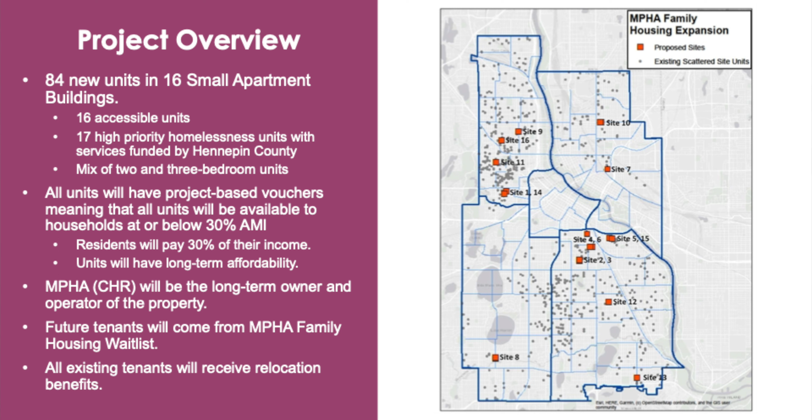The future tenants will all be people from the MPHA family housing waiting list. For those of you who know public housing, that means a lot of people, because the typical wait time is something like 6 to 7 years.

What brought them there was developing a strategic vision, and the fact that the city already owned a fair number of scattered site properties that could not be redeveloped for a number of reasons, as they just weren't financially feasible to rehabilitate. So they had a number of sites they could use for a scattered site project.

They currently manage 540 units. And importantly, the last 3 bullets on this slide, they felt really strongly that scattered site was the way to go because of their residents.

Historically, they have seen increased employment rates, increased incomes, and many families have gone on to homeownership if they had the opportunity to live in a scattered site.

So what we went from is 16 sites to 84 families that could live in scattered sites, because they were living in 4-plexes and 6-plexes instead of single-family homes. It's a huge multiplier effect for a program that's been so successful for families.

One of the things that struck me listening this morning is that innovation, wherever it happens, has to happen within the local context. I even talked about the fact that there's a lot of excitement in Sweden and in the European Union, because they now may have a platform that will allow for more innovation. The thought of having something like that in the US is really pretty exciting.

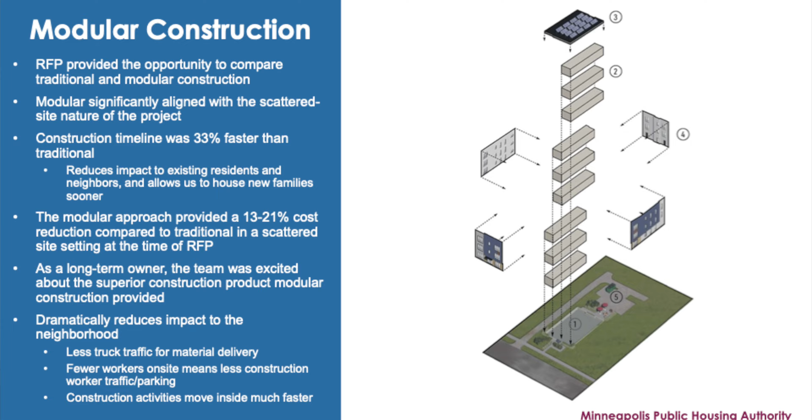It was really a factor because they were looking to get families into housing quickly, and the construction timeframe for this complicated scattered site project was 33% faster than the stick-built process. There was also less truck traffic since you're going into 11 different neighborhoods with these 16 sites, fewer workers on site, and construction activities move inside much faster.

Literally, on day one you're setting 6 modules, which they did on the fourplexes, so you have the ability to keep the site very quiet and friendly in a single-family neighborhood.

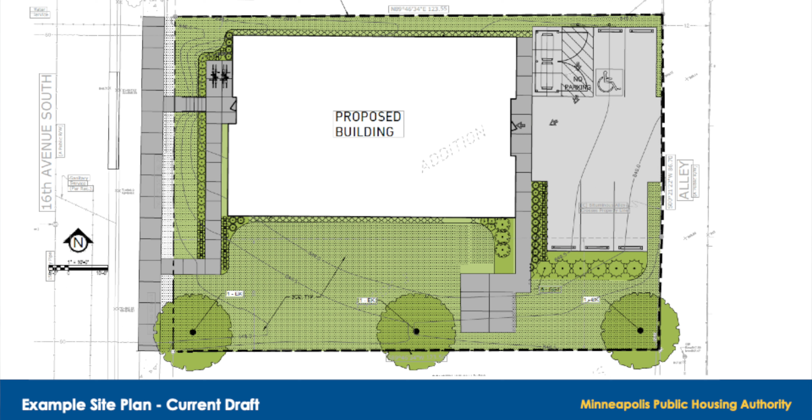One other factor I want to talk about, since scattered site gets talked about a lot as a desirable thing: one of the benefits of modular was that we had essentially one design, which I'll show you in a minute, and it had to fit on a number of different sites with different challenges, including mature trees, since this is in the middle of the city.

Before they even bid, the team that ended up winning went to multiple sites to ask, are there 16 sites among the ones the city made available where this building footprint will fit? If you look at these 6 sites, you'll see the building footprint is exactly the same, regardless of whether it's a 4-plex or a 6-plex.

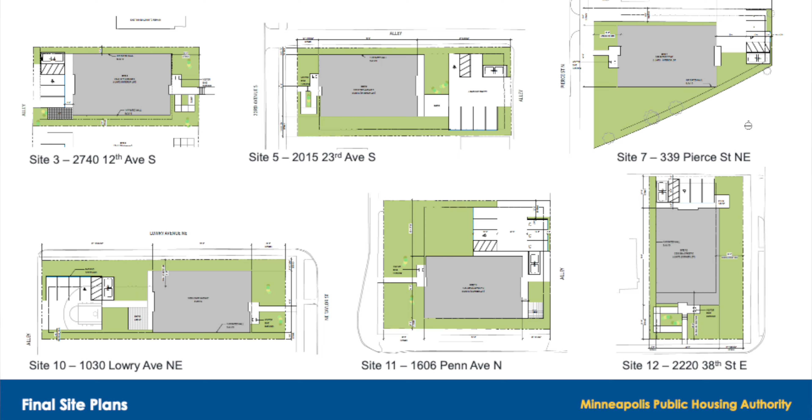The decision about which type of property, 4-plex or 6-plex, depended a lot on the size of the structure and, frankly, whether you could get the required parking on the site.

The design that was selected, and on the last page of this presentation you have the contact information for the architect who designed this project, was a single building type with a 4-unit and a 6-unit variant. The 4-unit is 2 stories: 1 two-bedroom and 3 three-bedrooms.

The 6-unit is 3 stories with 2 two-bedrooms and 4 three-bedrooms. If you do the math, this brought to the table 58 three-bedroom units, a really tough type of building to get, totaling 130,000 square feet of building spread over 16 sites.

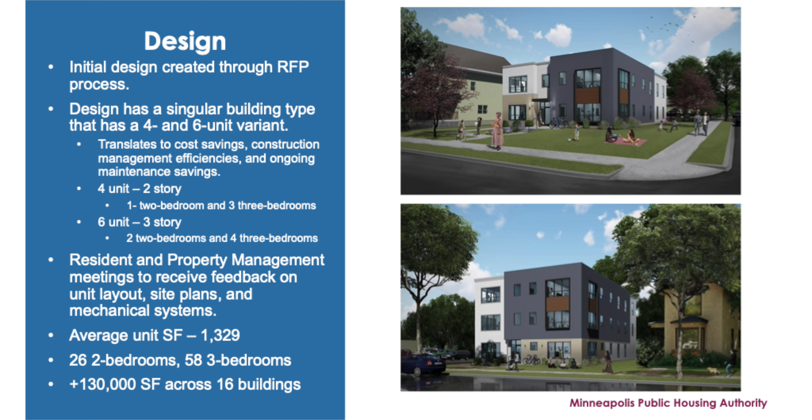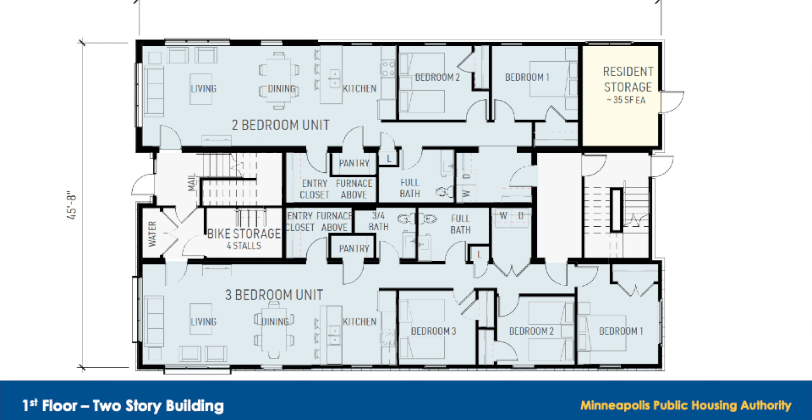Here's what the design looks like, and this is pretty unconventional for commercial modular. It's like a sandwich on each floor, made up of 3 modules. You have 2 outer modules with the living space, and a center module with almost all of the plumbing, utility rooms, storage rooms, and importantly, the 2 stairwells leading up to the upper floors. This allowed each of these units to be essentially identical, even though they were spread across 16 sites.

All right, this is where you see some of the challenges of doing a scattered site project in the city. Each of these sites, we have a lot of trees in Minnesota, a lot of mature trees, and lifting them up and over and getting them down. These are 16 feet wide, 72 feet long.

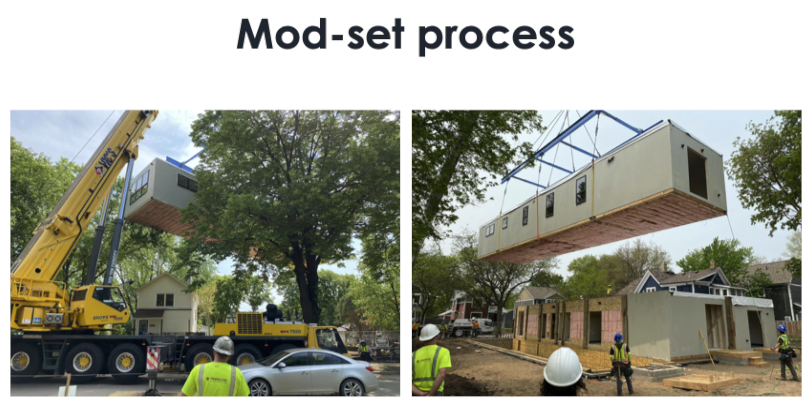Getting them down some of these residential streets was a little bit breathtaking, but ultimately successful. And all of the buildings have now been completely set, and they are now being finished. The first tenants moved in October 1st, and the final tenants will move in December of this year.

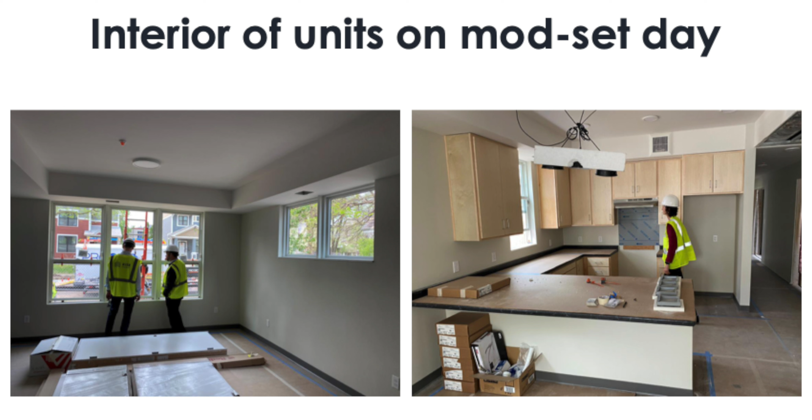So very fast process. This is what the units looked like inside on day 1, so this is the level of finish. And what the on-site crews did was stitch these units together and do the finishing work, do all of the site work, do all the connections of the utilities.

This is the hard part to talk about. This was not an inexpensive process. This project went into bidding for subcontractors at approximately the worst time that I can imagine, during 2021, when we were experiencing supply chain problems, delays in delivery materials, workforce shortages, extra requirements for worksite facilities, was when they were procuring the subcontractors. I will tell you that the modular portion of this went up only about 10% during that time period. The construction costs on the remainder of the project went up by about 40% during that project. So they ended up in a worse place than they hoped.